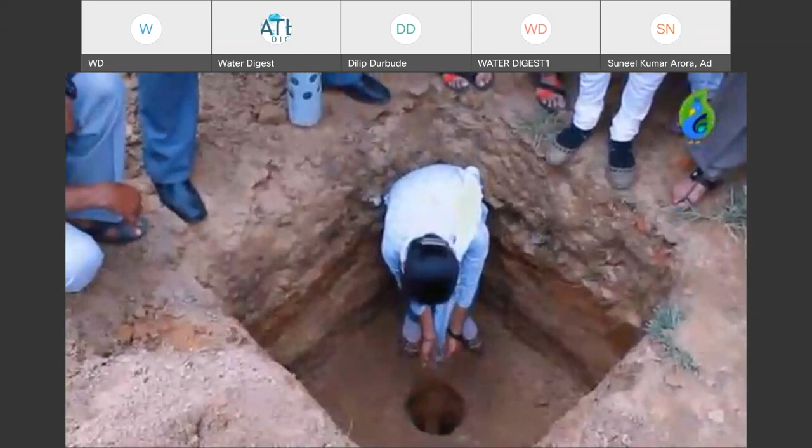Both in urban areas and rural areas, rainwater harvesting system must be made mandatory when sanctioning plans. We must ensure that water is not wasted and the groundwater reserves are recharged when the rain falls on the ground. We must catch the rain and store it.

I'm happy that the National Water Mission's campaign is taking up a timely initiative called Catch the Rain When It Falls.

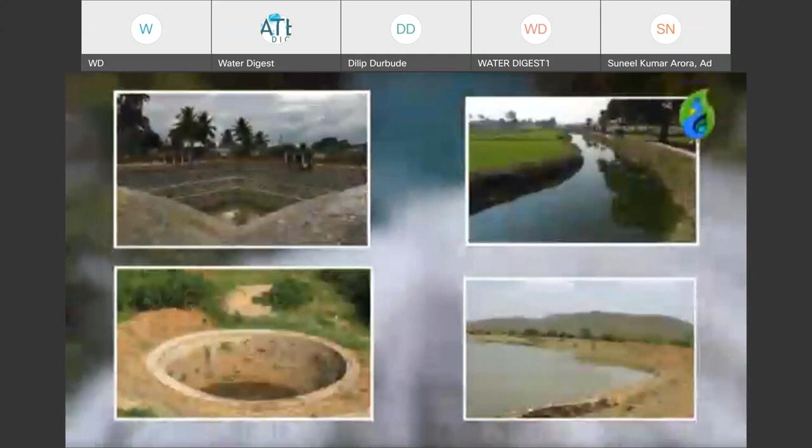We use as much as 85% of the water resources for irrigation alone, and therefore depleting the groundwater tables.

So we have a situation where we need to improve the management of our water resources, and this cannot be done only through the central and state government programs, because water touches our lives. And that's where the National Water Mission has launched major initiatives.

It conducts regular talks. Every third Friday, there is a talk on water, and on every second Friday, there is a talk on water technology issues.

Apart from these initiatives, there is the initiative of Jal Shakti Abhiyan, which was conceived of in 2019. For a campaign to be really successful, it has to have the commitment of the top political leadership.

And what better commitment can there be if the Prime Minister of the country gives this clarion call to the citizens to participate in this program.

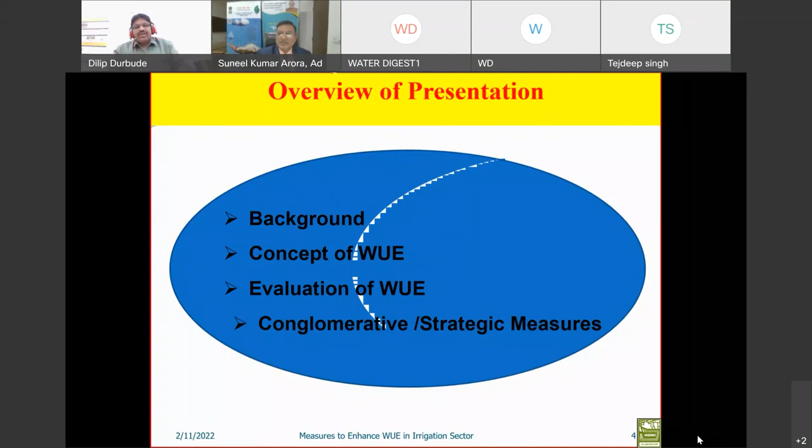For that purpose, there is a need to evaluate water efficiency so that we can utilize whatever irrigation potential has been created, effectively. So that will be the overview of the presentation.

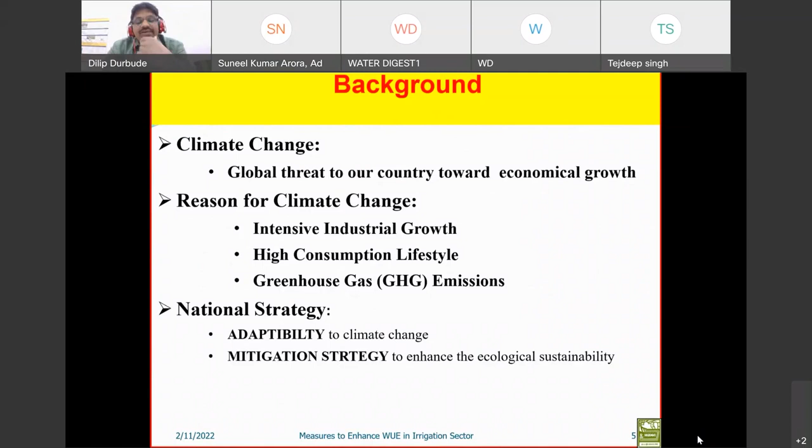This is nothing but a climate change model, because now all of you know there is a changing climatic scenario, and that is a global threat to our country's economic growth in the future. The reason is simple: industrial growth, high consumption lifestyle, and emission of greenhouse gases are behind this. To cope with or tackle this climate change scenario, at a national level we should have strategic measures — adaptability to climate change or some mitigation strategy — to enhance ecological sustainability.

Now, how is this climate change responsible in our water sector also? The distribution and quality of water resources through this cycle is altering, responsible for global warming, change in temperature, and its effect on our hydrological cycle, where we get all the available water resources — the hydrologic cycle, where storage and movement all take place.

Through this component, the crucial component for us is precipitation. There is a change in the precipitation pattern, and through this precipitation, the response for the runoff generation process is changing. That's why the availability in the surface or subsurface is changing over the period of time. If you compare the past with the present, you will find there is somewhere uncertainty in the pattern of precipitation — the distribution is uneven.

Somewhere there is more water; that is, the spatial and temporal distribution is uneven. Somewhere it is more, somewhere it is less. That's why there are now events like cloudbursts and flash floods. So the intensity of the rainfall is increasing over the period of time.

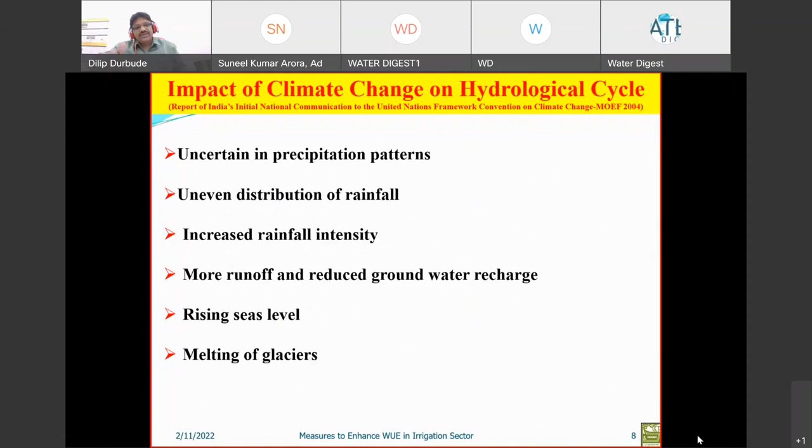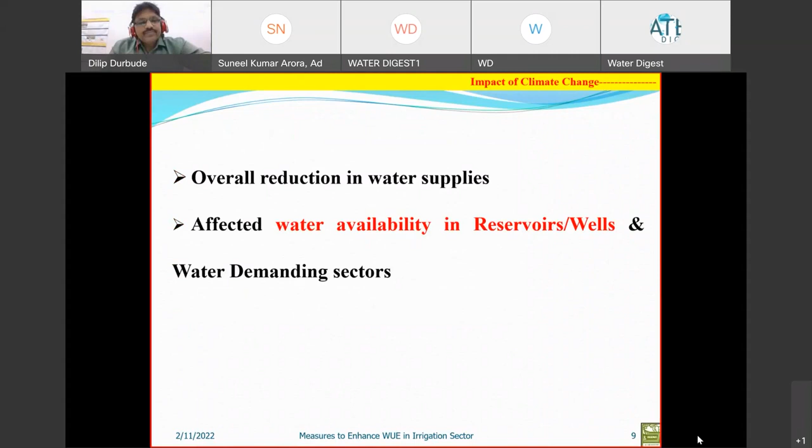This process is also affecting groundwater recharge, because once there is more intense rainfall, the infiltration and the recharge of the groundwater will be affected. Due to this, there is an overall reduction in the water supply, and that is affecting our water availability. So whatever the demanding sectors for water, they are going to be affected.

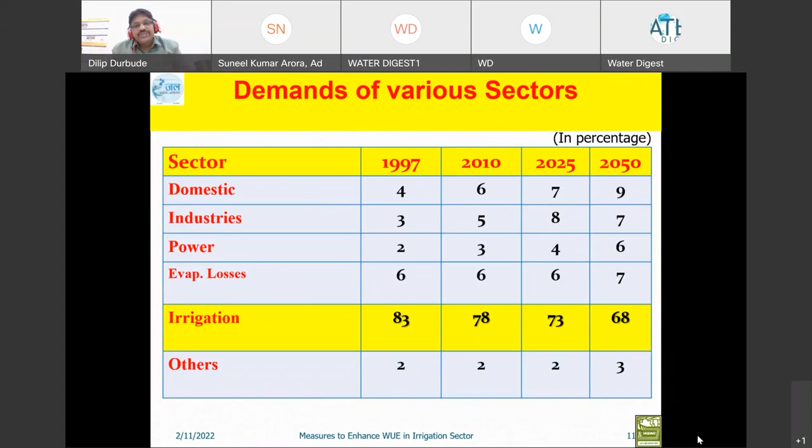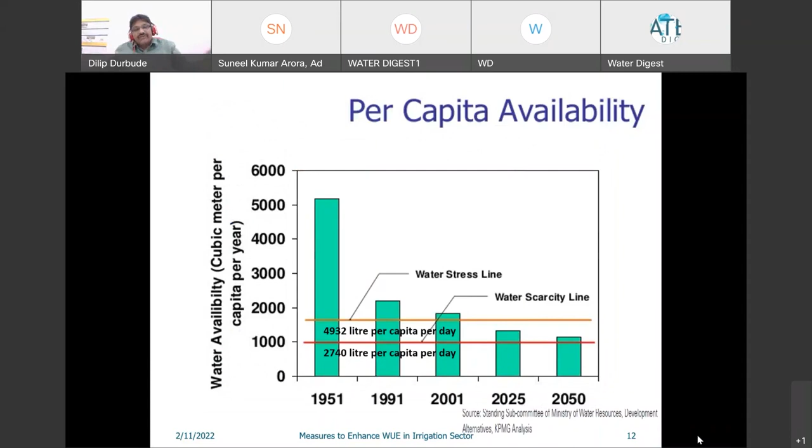Why? Because it's a high demanding sector having poor or low efficiency, and that's why in future, with per capita availability like this, you will be on the water scarcity line in the coming years. So likewise 2740 liters per capita per day will be the availability in future, and within that available water resource, we have to satisfy all our demands.

If you compare globally, India's per capita availability is very low compared to other countries, and that's why there is a gap between availability and demand. Over the period of time, maybe after 2025, towards 2050, there is a huge gap between availability and demand. Now the question arises, how to satisfy this gap? What are the solutions?

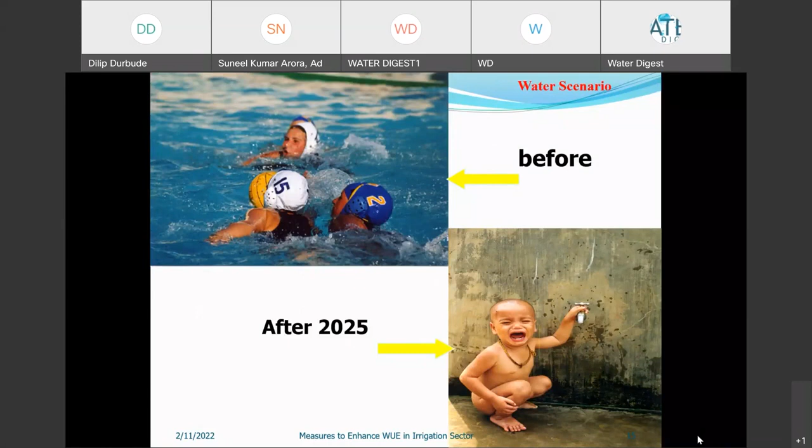And maybe the future scenario will be like this: the boy is crying for water. Even now we are seeing all these scenarios. That is going to happen in future if we don't have any measures or management aspects to minimize this gap. And that is going to hamper future water and food security. There is a probability that one out of three will get water.

Quality also, because day by day groundwater is depleting, and depleting groundwater again has water quality problems, like TDS, salt, hardness. So on one side there is an availability or quantity problem, and quality also. And that is going to impact our food security. Probably one-third of the population will not get food. Apart from this, there will be waterborne diseases.

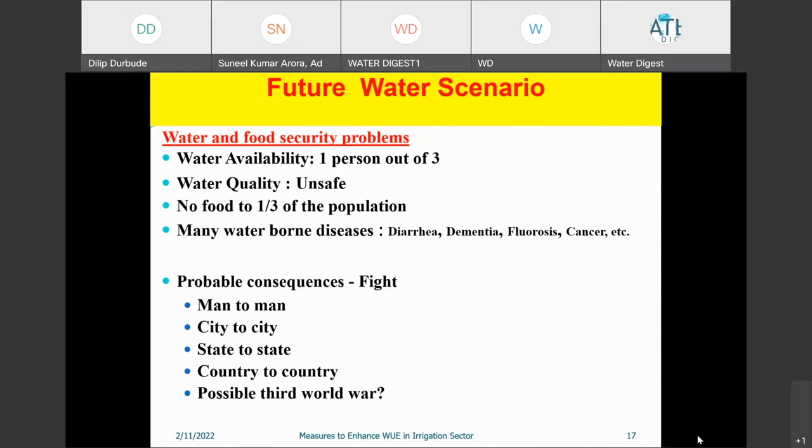What will be the impact of this? What will be the probable consequences? Of course, when one person out of three gets water, there will be a fight. Nobody will say, okay, one person is getting it, he will enjoy, and two will sacrifice. It is not like this. So a small marginal fight for water availability will be there, man to man. It may extend to city, state, country, and maybe a big fight for water. That is a possible future scenario.

So how to minimize the gap between availability and demand? It is a very good picture if you see it. Could you produce water? Could you produce it?

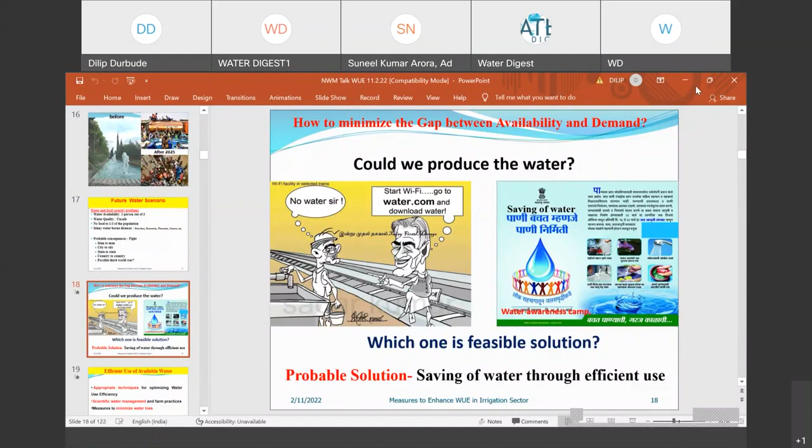Sorry for the disturbance. So from this picture, you can see that it is not a virtual quantity. So what to do? There is a requirement of saving water. Whatever the losses, you have to minimize them. For that purpose, like Dr. Arora sir told, the Jalakranti Abhiyan or the water awareness camp are feasible solutions which can solve these water problems. The probable solution is saving of water through some optimal means, and what is required is techniques for optimizing water use efficiency, scientific water management, farm practices, and measures to minimize water losses.

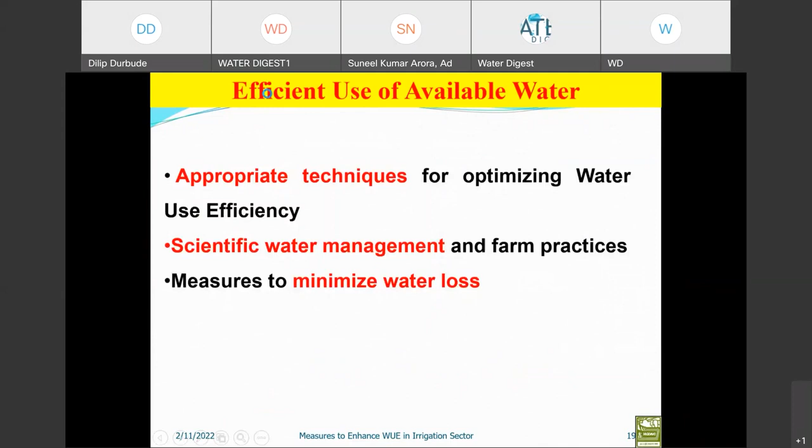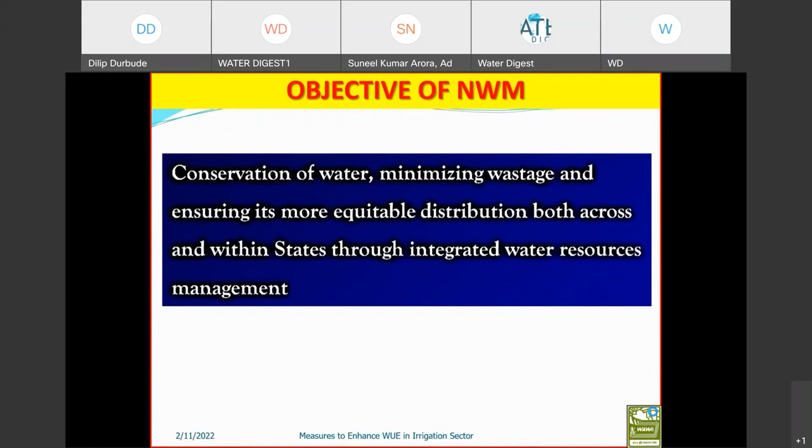So on that basis, in 2007 itself, under the NAPCC, National Action Plan on Climate Change, eight missions were formulated in mission mode, and especially one mission, the National Water Mission, exclusively to solve this water problem, with the objective of conservation of water, minimizing wastage and ensuring more equitable distribution both across and within states, through integrated water resource management. There were different goals, and one exclusive goal was increasing water efficiency by 20%. What does it mean? Whatever the present efficiency of our irrigation projects, within five years, increase the present efficiency by 20%.

So what different things are required? How to evaluate that? It is possible because, through the CWC 2016 study of 35 irrigation projects, they found that the present efficiency level is very poor. For surface water it is 35 to 40%, and for groundwater it is 65 to 70%. There is a scope to improve this with a systematic approach or strategic measures, so it is possible to enhance this efficiency up to 60%. For that, strategic measures are required on both the supply side and the demand side, strategic research and appropriate techniques, so that you can enhance the efficiency of each and every component of the irrigation project.

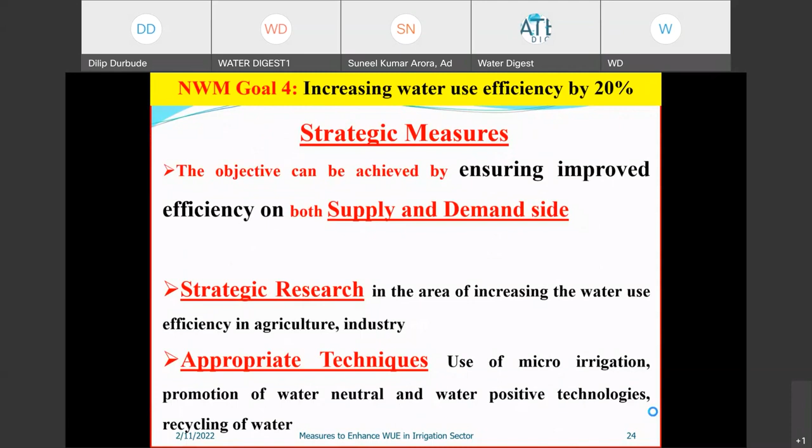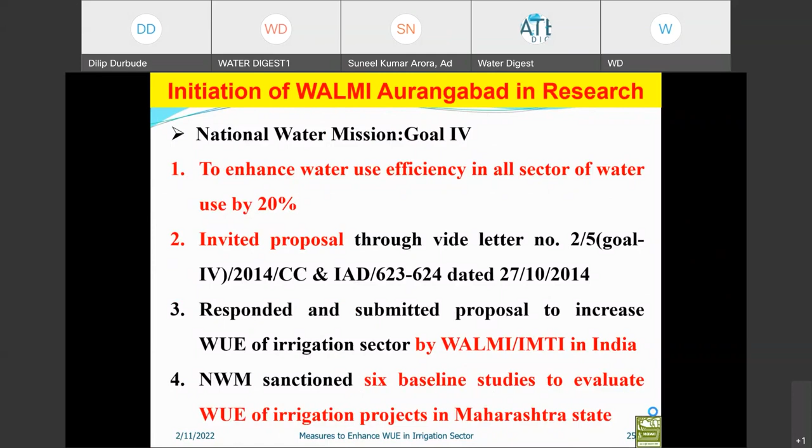So the National Water Mission, under its goal, initiated this concept of enhancing water efficiency by 20%. They invited proposals from all the WALMIs and IMTIs in India, and we responded, and they sanctioned some projects. Now about 26 projects are running on water efficiency, involving WALMI, IMTI, CWRDM Kerala and others. In Maharashtra state, we are evaluating efficiency for six projects at present, and I am going to share the experiences and measures from these projects. These are well distributed in Maharashtra, and the objective is to evaluate the various components of efficiency.

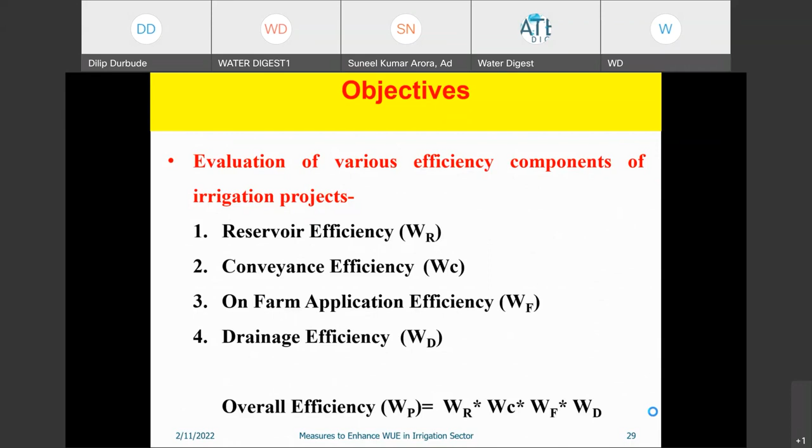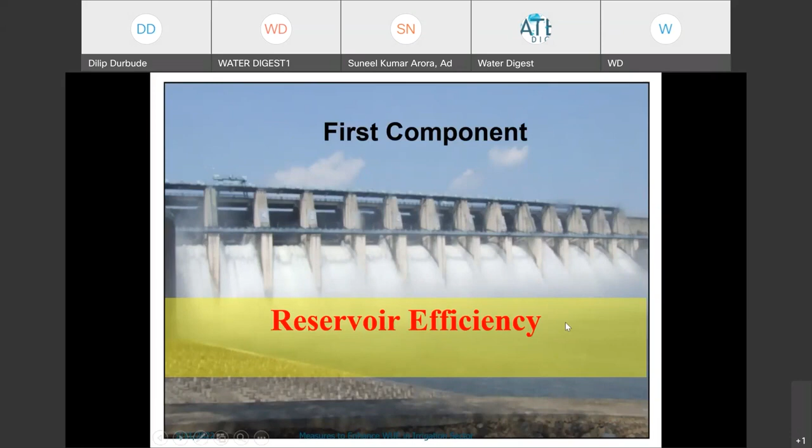Because if you see an irrigation project, there are various components, from the storage part to the on-field part. Section-wise, in the reservoir there is storage, then you have to convey it through the irrigation network, after the outlet you have to deliver the water, and you have to apply the water using irrigation techniques in the farm, that is the on-farm application part. The product of all these component efficiencies represents the overall efficiency of the project. So the first component is reservoir efficiency. That is the storage part, where you get water from the catchment, so the inflow pattern is very important. Are you getting the live storage attained fully each and every year?

Because whatever the demand or the irrigation potential utilization, that all depends upon your live storage. So the maximum live storage attained by this reservoir will reflect the reservoir efficiency or the storage efficiency. But in general, you will find that there are losses in the storage itself through evaporation, seepage, and sediment deposition also. So for that purpose, ultimately, you have to have catchment hydrology, which plays a major role in this component of storage efficiency.

So whether the catchment hydrology is studied well or not, that is a requirement to assess this runoff inflow pattern. So this is one of the case studies we conducted, and for that we carried out the storage efficiency. You find that throughout the previous 10-15 years, the storage is not 100%.

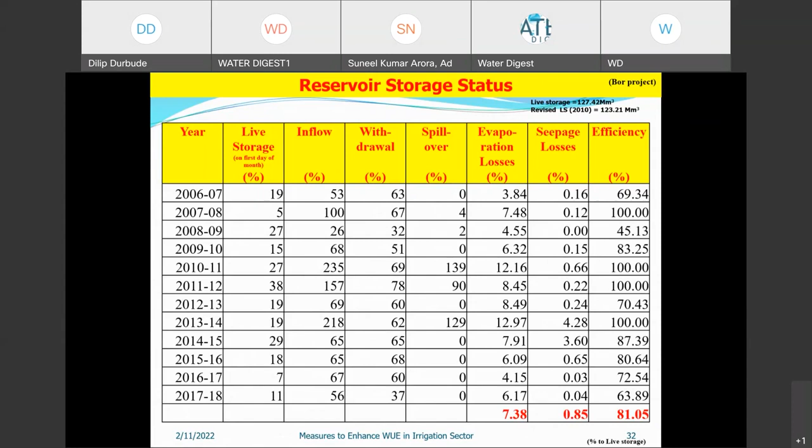Maybe due to the rainfall pattern, the catchment yield is not that much, the inflow pattern is not giving 100% storage. So due to this, if you see the average efficiency, it will be reduced, it is not 100%. That is going to affect our overall project efficiency. So in that way, you can find out whatever the losses in the storage part, and whether it is attaining live storage or not.

Second thing is, you see that here is a revised live storage. What happens actually, through this inflow pattern, it is carrying sediment from the catchment. That is depositing not only in the dead storage, but it is depositing in the live storage also, the suspended part. So over the period of time, our live storage is reducing due to siltation. So there is a need for this revision of the live storage.

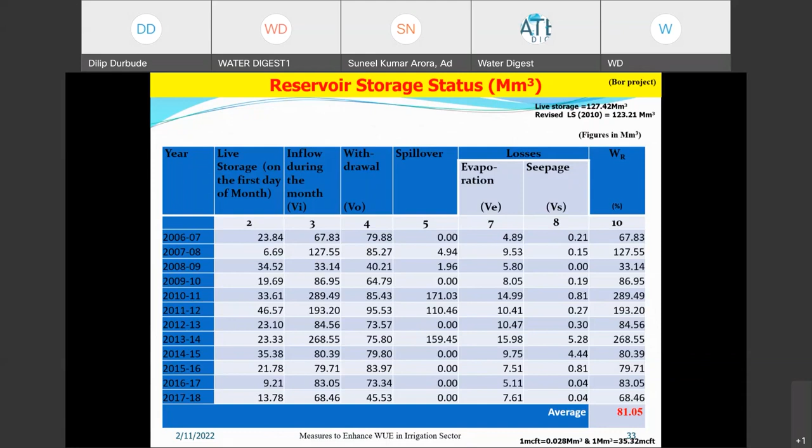There is a requirement for this revised live storage calculation. In every project there is an elevation area capacity table. So you have to revise that elevation area capacity table so that it will reflect the actual live storage you are getting over the period of time, on average. That is the storage efficiency. In the figures you can see the inflow pattern, how it is. So every time you are not getting the net storage full 100%.

Apart from that, there is whatever spillage over the weirs. Only 3 times is there in Maharashtra. It is happening because it is the Marathwada region, or you can see in the other regions also. The reservoirs are not attaining the full live storage. So that is going to impact this reservoir storage efficiency. Likewise, in the live capacity also, there is a loss due to evaporation and seepage, and that loss is there every year.

You have to see those losses also, and accordingly, you have to analyze the withdrawal from the canal system over the period of time for the different seasons. So you find that even though the reservoir attains the live storage capacity in most of the years, there is only an optimal withdrawal up to 78% of the net storage.

Why? Because there is a lack of assurance among the farmers. They are worried that if they go for the cropping pattern or more agricultural cultivation, will they get the rotation of the water? Will they get irrigation water timely, whenever they require it? That's why they are not demanding also. There is a lack of demand due to their lack of assurance of timely irrigation.

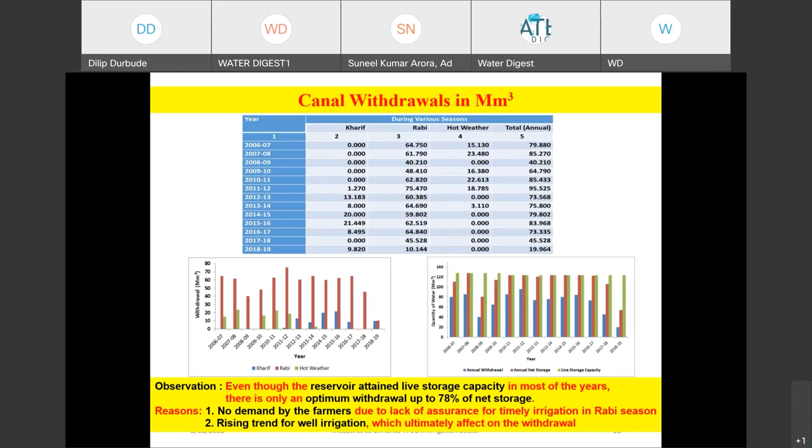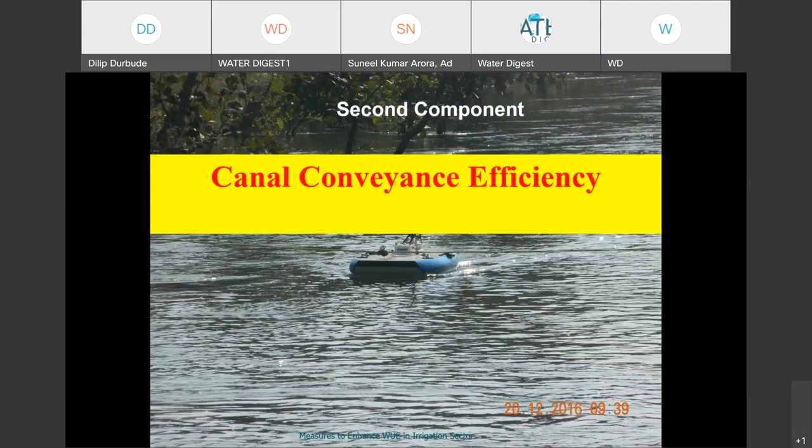Second part is canal conveyance efficiency. Is our network well managed? Is the repair and regular maintenance there or not? That is the question.

Because from this head regulator, whatever the desired flow, is it flowing throughout this network or not? If it is not flowing throughout the network, then there are a number of losses in there. So it is the delivery at the inlet to the block of the field to the project release at the headwork. That is the ratio between these. And as per the CWC guideline, the inflow-outflow method, you can use this to evaluate the conveyance efficiency part.

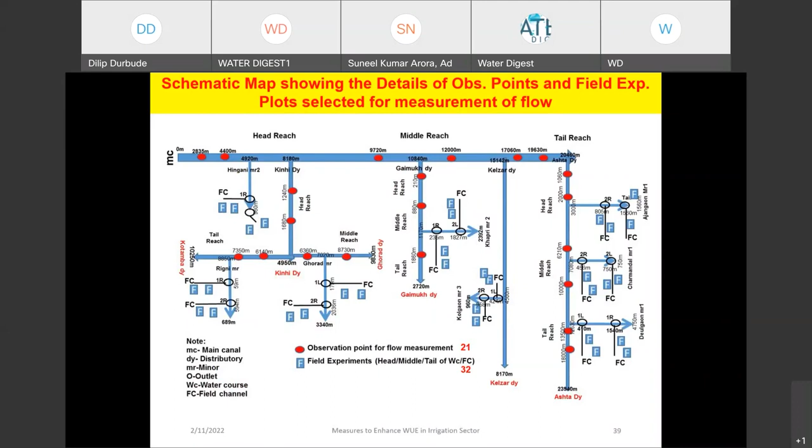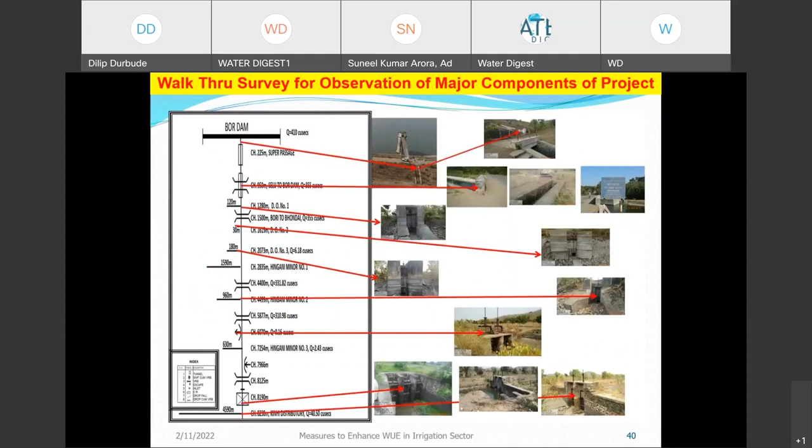So it can be evaluated by sample means in the head, middle, tail reach. Likewise, you can categorize this command area, and within these various reaches, you can measure these losses. Whatever the different losses through this main canal, then distributaries, minors, can be measured, and you can identify the seepage losses through this network. So for that purpose, we conducted this walkthrough survey. We identified the conditions of the various flow controlling structures, flow measuring devices, cross regulator, head regulator, all these things. And we tried to find out the present condition of this conveyance network.

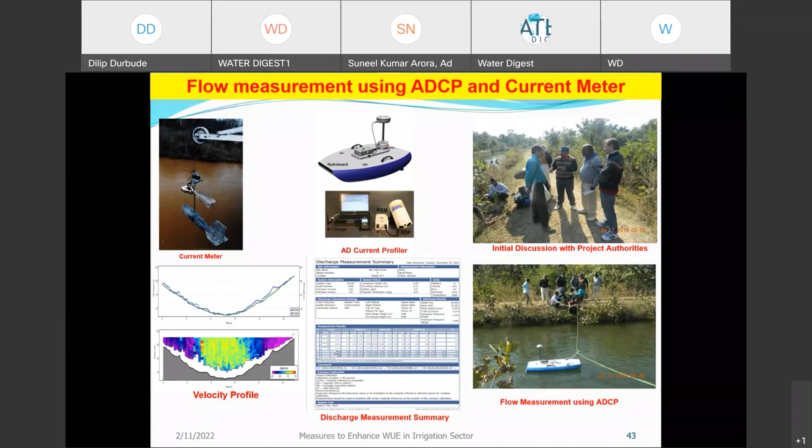And here, for the first time, we used this ADCP instrument, that is an acoustic Doppler current profiler. If you compare this ADCP with a current meter, there are a number of huge advantages. Time requirement, and accuracy wise, it gives a velocity profile, while the current meter requires a number of readings within one section. So it is an enhancement, an advanced instrument you can use, and you can measure these conveyance losses in a timely way. So we tried to measure these losses using this acoustic Doppler current profiler at various sections of the canal network, in the head, middle, tail part of the main canal, distributaries, and all other things.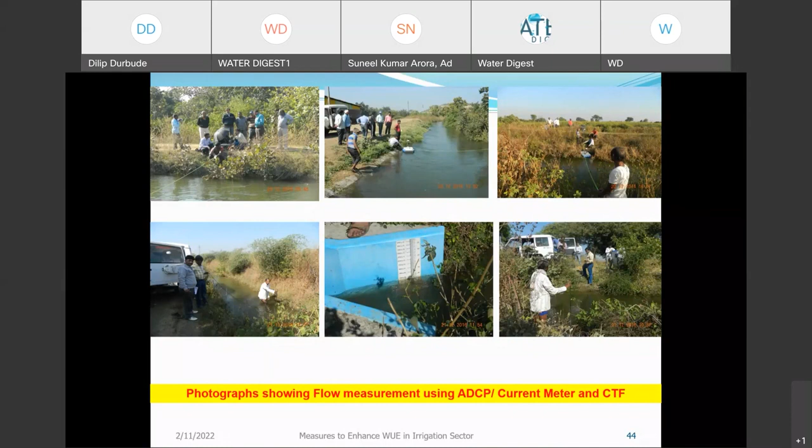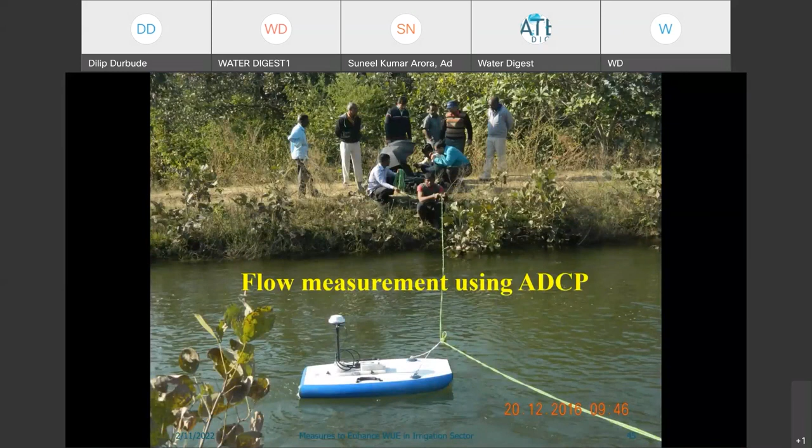Apart from this, in the small canal network, the ADCP will not work. For that purpose, we used the CTF, cut throat flume, and also the standing wave flume. Likewise, measuring devices were used. This is like a boat, and within 20 minutes or one scan, it will give a velocity profile. So within maybe 20 minutes, you are able to measure the flow through this section of the canal.

And you find in this profile that the velocity is varying. At the edge points it is low, and in the middle portion it is high. So the velocity is not the same throughout this section. That's why if you are using a current meter, you have to take so many measurements. One or two measurements will not give a correct measurement of the flow at this particular cross section of the canal. Compared with the current meter, the ADCP, with minimum time and great accuracy, will give a better result. And the table is also given. It gives the width, area, and flow also.

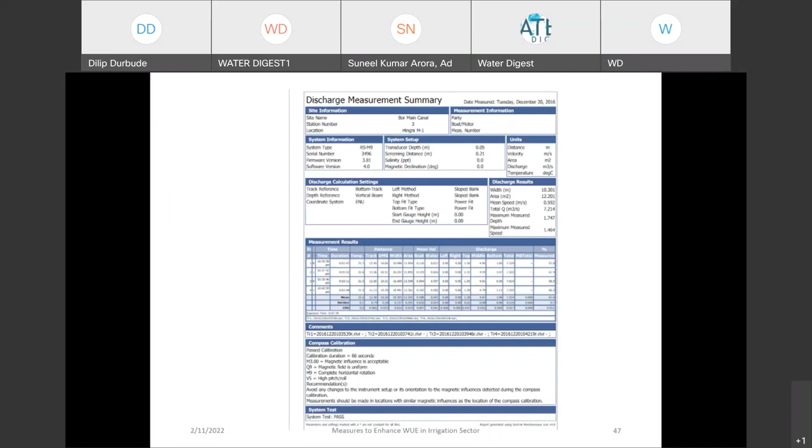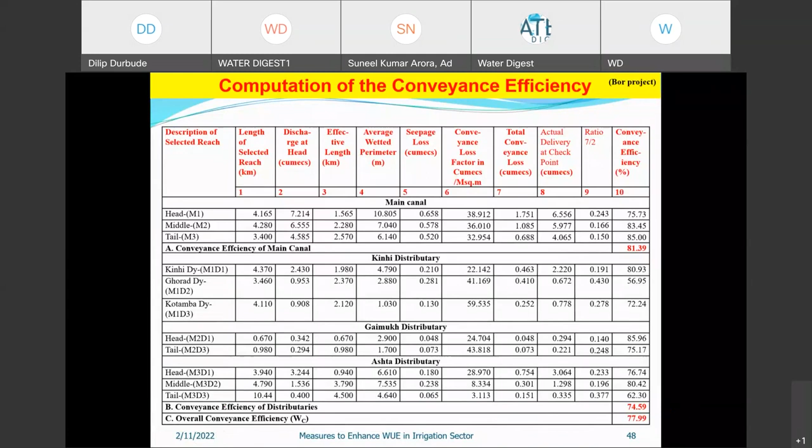So what is the reason behind this? The reason is that there is no regular or periodic maintenance of the flow controlling structures. Head regulators are not maintained. Then how is it possible that the desired flow will flow throughout the section? So regular maintenance is required. The second thing is canal linings are disturbed.

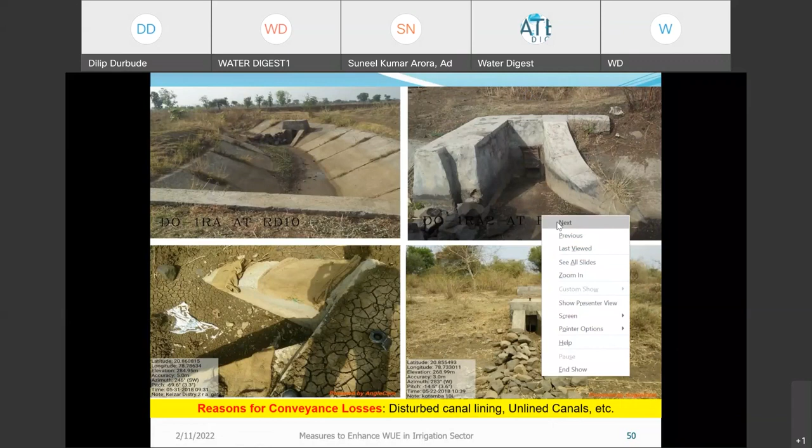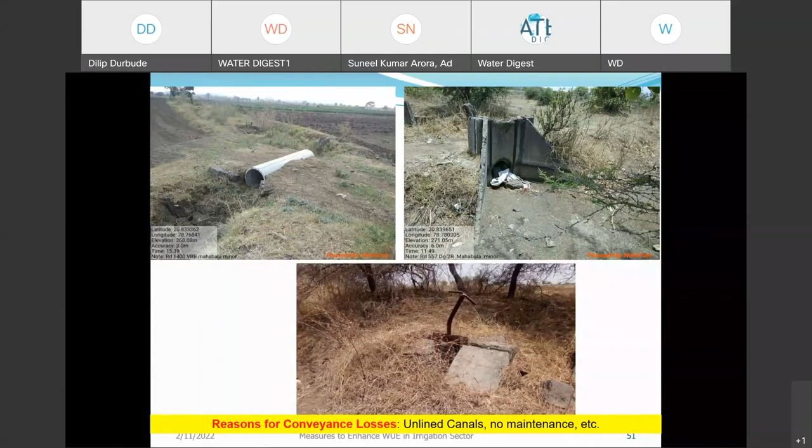So the reason behind this is disturbed canal lining. So these are the maintenance part. Throughout this network, you find that the problem in this project also is manpower problems, and second thing is that the field canals are not maintained well. So those are the reasons why this conveyance efficiency is not as per the requirement.

Third part is the on-farm application. This is a very important part because it is now the demand side. Reservoir efficiency and conveyance efficiency are the supply side part. In the demand side part, on-farm application efficiency, you find that there are two losses in the farms. One is through the field channel, and second is the application of the irrigation method.

So how accurately you are giving water as per the water requirement, the applications are not there. So in that case, the water course field channel losses, is it lined or not? And second is the on-field application part, there are losses through deep percolation or leaching. That means whether the irrigation applied is as per the crop water requirement or not. So if you see this field water balance, then you find that

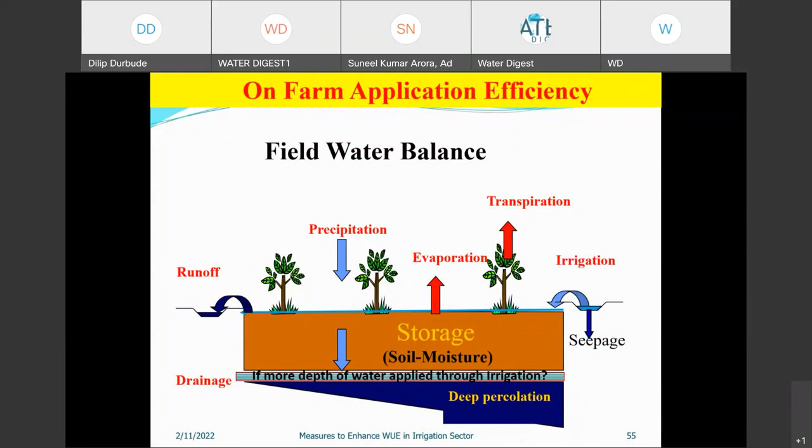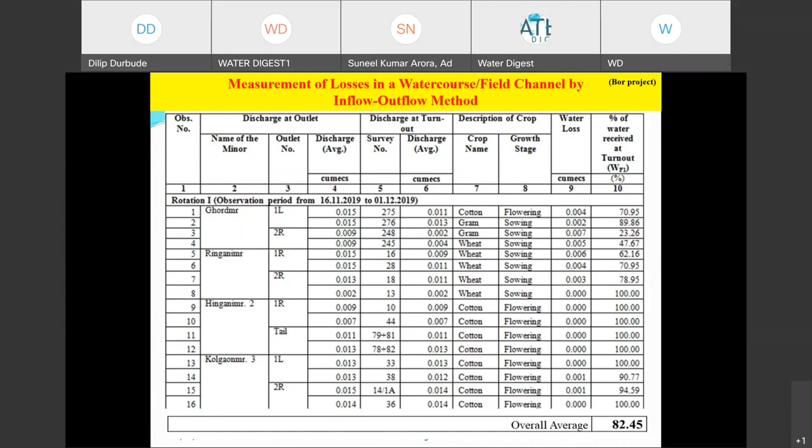But where there is a distance, meaning a conveyance part in the field channel, there are losses in the field channels, and that's why the overall efficiency of the field channel gives a lesser value. Second thing is the crop water requirement: whether the water you are supplying is as per the main crop water requirement or not. If there is under irrigation or over irrigation, then the water efficiency in this second part will be affected.

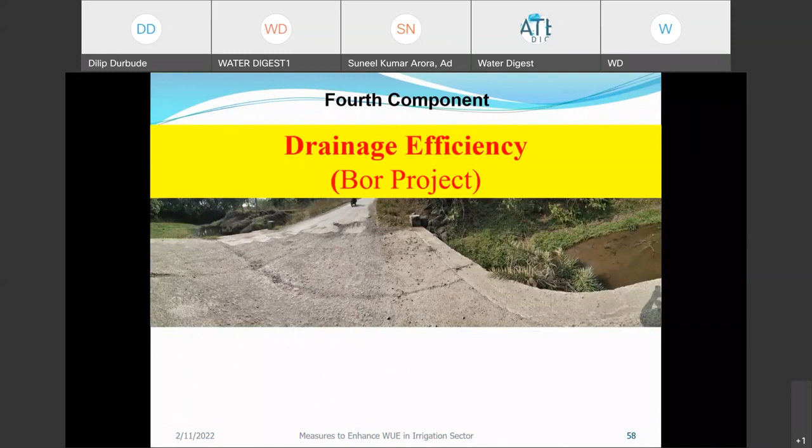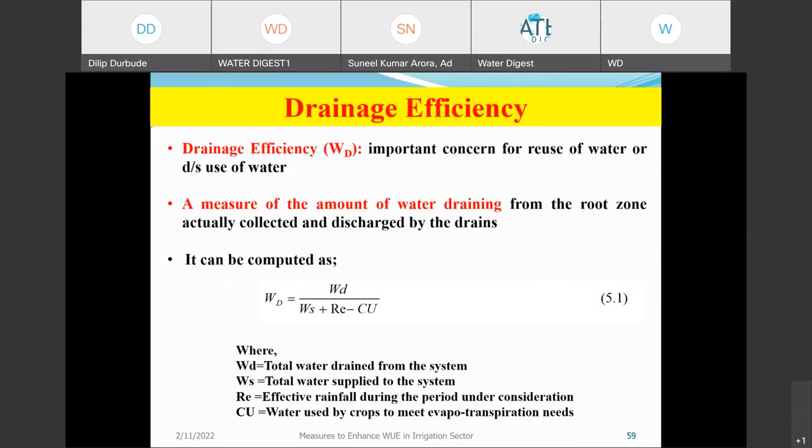Fourth part is the drainage efficiency. If your application is as per the water requirement, then there will be no problem with the drainage efficiency. Whether your drainage network is good or not, again you have to see. In that case, you have to see the total water drained from the system and the total water supplied for the crop water requirement. The ratio will reflect the drainage efficiency.

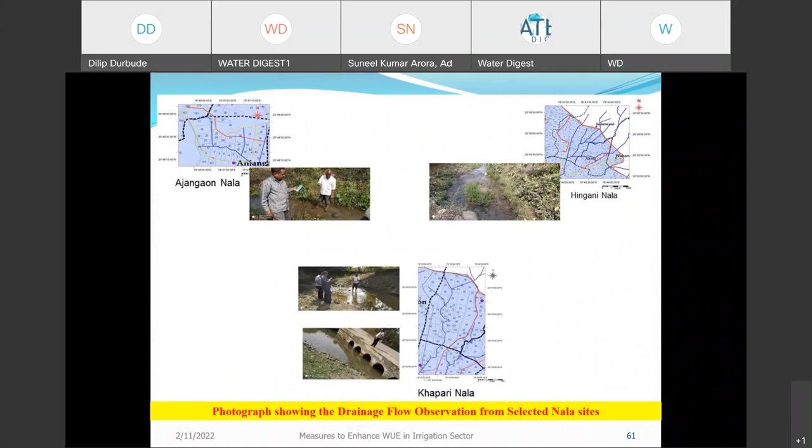So for that purpose, we have taken a number of drains in the command area, and you measure whether drainage losses are there or not. But in this project, you find there are none, because whatever quantity you apply through the command of the minor or the distributary is consumed there itself. It is not that much, so that excess amount goes out of that command area. That's why the drainage efficiency is very good.

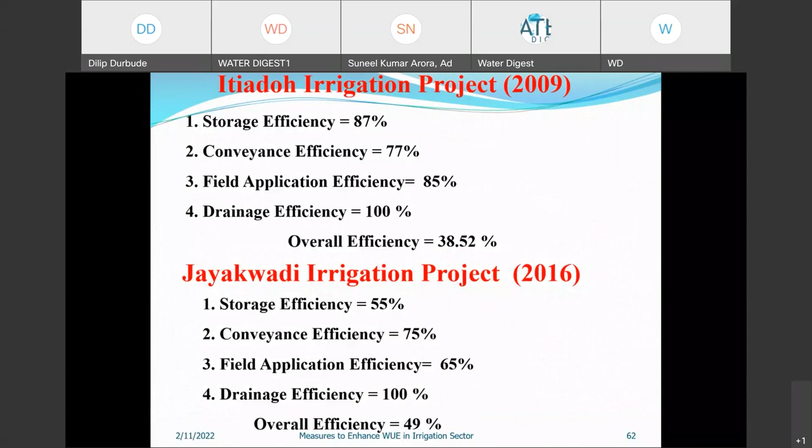In the Itiadoh project and in the Jayakwadi irrigation project also, working out using this methodology, you find that the overall project efficiency is within the range of 35, 40, 50. In this project also, all the water efficiency components can be computed, and you can find the overall project efficiency. But we can have a practical achievable limit. Reservoir efficiency can be achieved up to 95 to 98%. But if it is less, 80% in our case, what cumulative or strategic measures can you adopt?

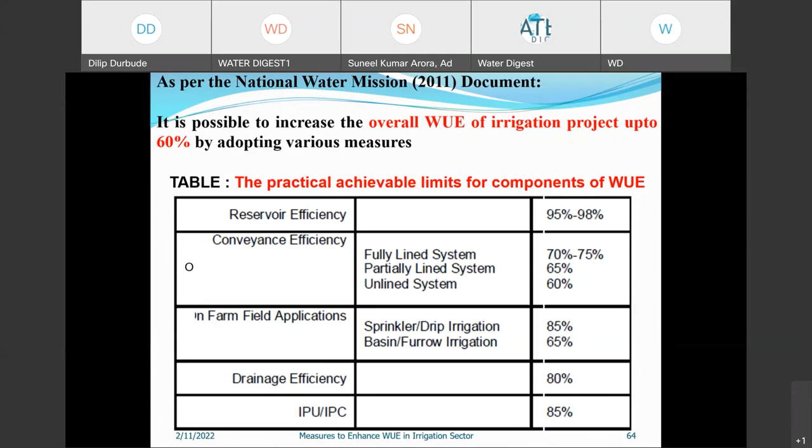The reason for this reservoir efficiency against the practical achievable limit: one thing is the inflow pattern, and the elevation-area-capacity table is not revised. Second, there are evaporation losses and seepage losses. So you need measures to enhance this efficiency and achieve the practicable limit. Likewise, in conveyance efficiency, are the canals lined or not? What are the seepage losses? Is water taken out in any unauthorized way? That you have to see. Likewise, you can achieve this efficiency with policy level or institutional level measures.

So my purpose of this presentation is to tell about the strategic cumulative measures so that you can enhance this poor efficiency level, which is 38%. It can be enhanced up to 60% if you adopt some measures for that purpose.

As already discussed, periodic assessment of the sedimentation in the reservoir and revision of the elevation area capacity table are needed so that you can have a revised live storage capacity, and accordingly your storage efficiency will be as per the actual.

Second, you have to carry out hydrological studies of the catchment for yield assessment so that there will be an improvement in efficiency. If there are losses through evaporation, it is possible to minimize these losses through windbreakers of bamboo trees, or you have to go for catchment area treatment. Likewise, there are measures or policy level decisions you have to take.

When I worked with the National Institute of Hydrology from 2002 to 2007, there was a drive to assess or reassess this live storage capacity using digital image processing of images acquired through remote sensing technology. That technology can be used to revise the live storage or the elevation area capacity of the project.

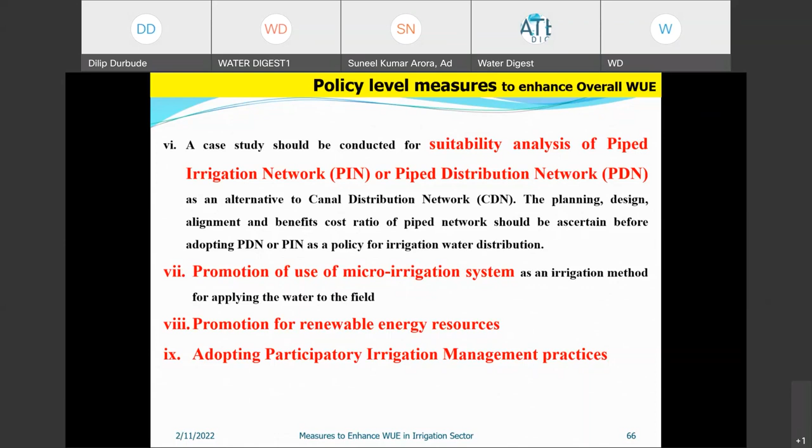Then, promotion of renewable energy resources, because adopting micro irrigation again creates a problem for electricity. So solar energy, solar power, solar cells can be promoted and adopted, along with adopting participatory irrigation management practices. These are policy level decisions that can be taken.

Apart from this, administrative level decisions like improvement in the distribution network, structural measures, selective lining of canals, regular replacement of damaged gates, and regular repair of flow controlling and flow measuring devices.

Then, formation and strengthening of water user associations, because water user associations have a major role - they should have their own system and manage it themselves. Likewise, in Maharashtra itself, through the MMISF Act 2005 and Rule 2006, they are now thinking about handing over the management of the project through water user associations.

Such things should be there. Apart from this, there should be training of the farmers, because in the stakeholder workshop they are not clear cut about these issues. They have to be sensitized about this water problem in the future, water saving technologies, adaptation of micro irrigation. For that, awareness and farmers training should be there so they can understand this water crisis problem and the advanced techniques of irrigation better.

So in the field, if you find what is needed, because there is siltation, there is a flow controlling and flow measuring device. It is called the CTF, cut throat flume.

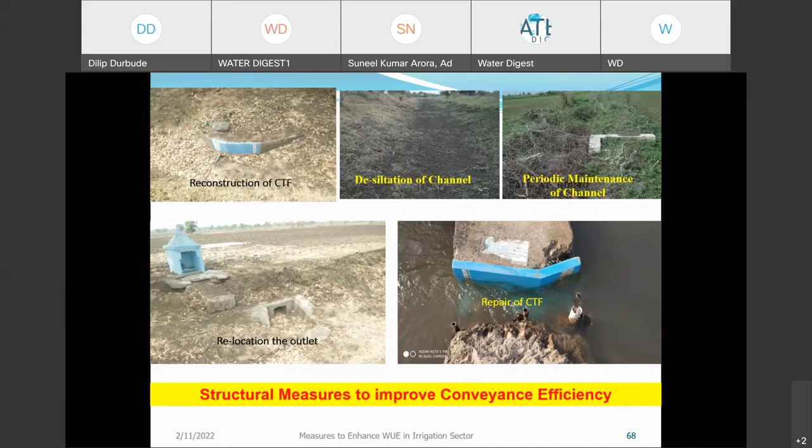So likewise, though it is a measuring device, it gives the design flow of this minor or canal. They should be aware about this. That's why they are just damaging the structure - they are not able to maintain this channel, and somewhere they misuse it.

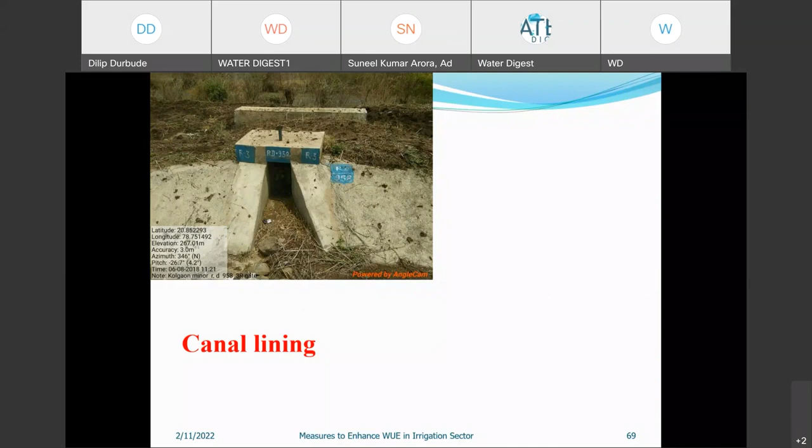It should be maintained properly. In one of the projects we've seen that the outlets are proper, canals are lined properly, managed lining is there, and there is CTF clearance. In some projects where such activities have taken place, you find it is able to enhance utilization of the irrigation potential created, and you can supply water up to the tail end also. So that should be there.

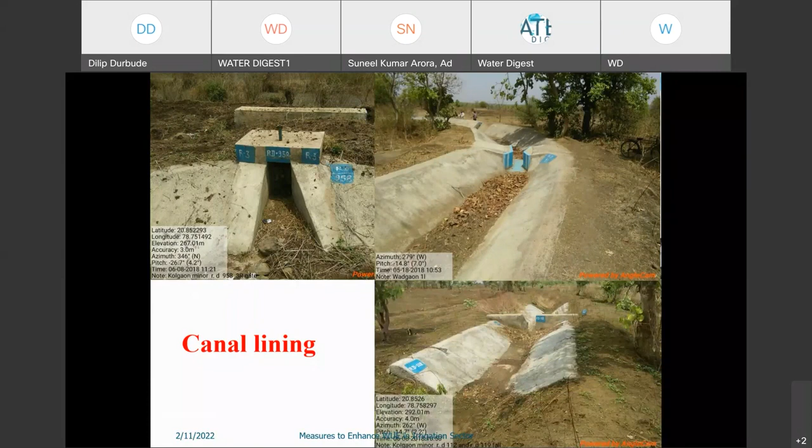Some exposure to the farmers about this project would be there. Then repair of the damaged lining should be there. If the damaged lining is not repaired, there will be a seepage problem like this, with seepage losses. So you can enhance efficiency or minimize these losses using repair and maintenance work.

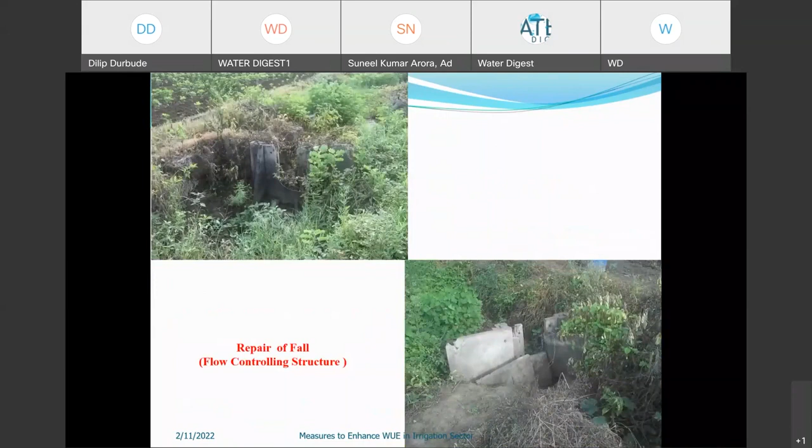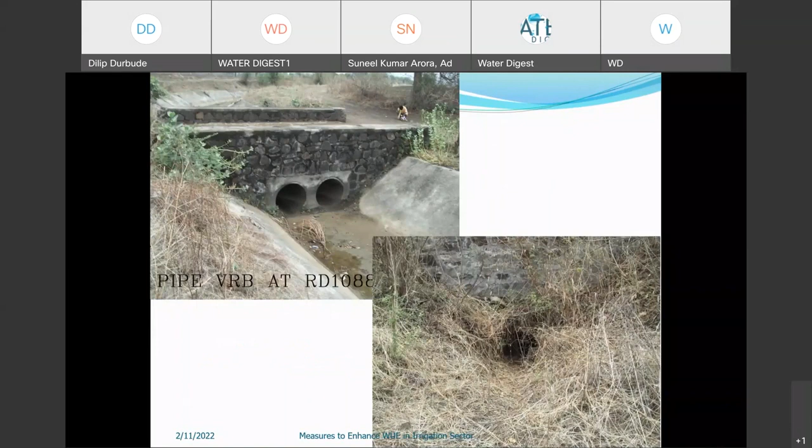Maintenance of the flow controlling structure should be there. Repair of the falls should be there, and flow controlling structures maintained. There should be maintenance of the canal like this - it should not be like this, because then the design flow will not flow through this canal. Some flow controlling structures should be there, and they should not be broken.

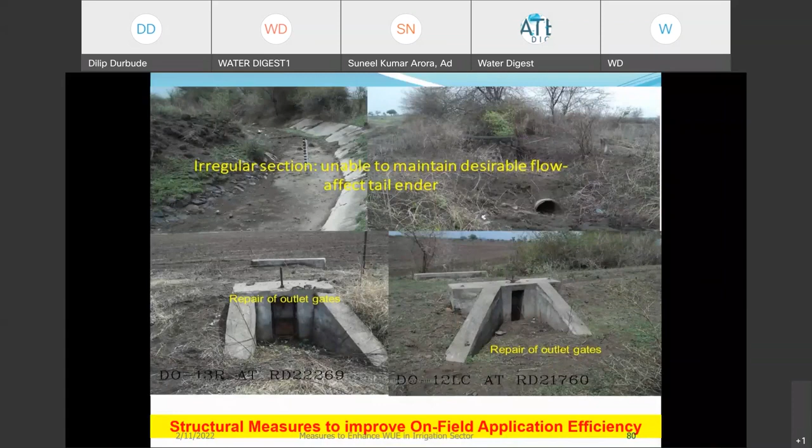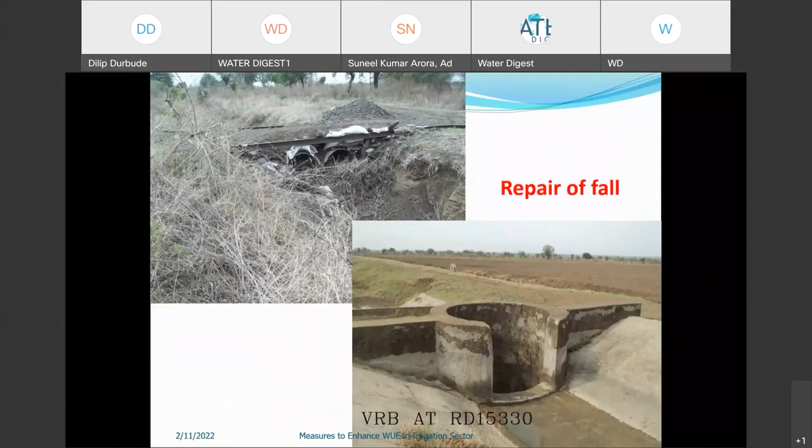Likewise, you have to make farmers aware so that they do not break these controlling structures. Channels should be desilted where siltation is there, so that the regular section is maintained - otherwise it will be unable to maintain the desired flow and that will affect the tail ender. That's why all this repair and maintenance, these structural measures, you have to adopt for this purpose. Once that structural measure is adopted, it is possible to enhance water efficiency.

Likewise, if there is flow through the field canal that is unlined, there are losses of course. So you have to, if possible, line these field canals also as they irrigate their fields.

They don't know how much quantity of water they have to give to the cotton crop. Their opinion is just to irrigate the field for 20 or 30 hours - there is no scientific way, no calculation. They go by their experience, their mental model over the period of time, just irrigating the field. That's why there are huge, tremendous field losses, and we are getting poor on-field application efficiency. All these losses can be minimized.

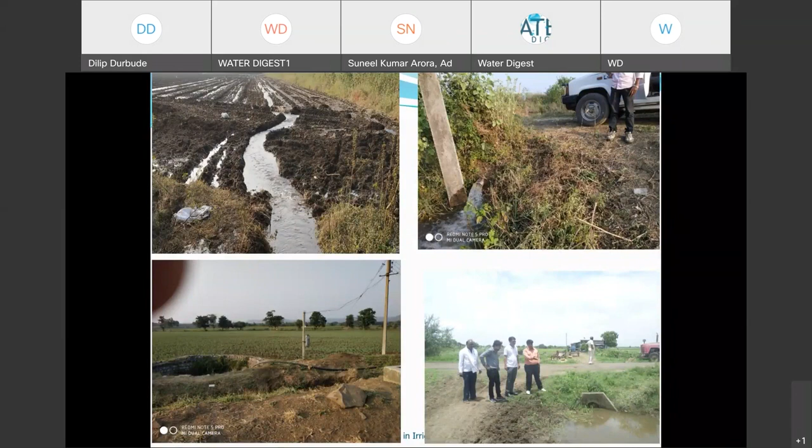Why? Because they don't want to give this volumetric basis water charges. To avoid that charges, they are doing this. Here is a pipe, and they are just taking the water in an unauthorized way. Here also there is no defined channel, where to give, how much to give.

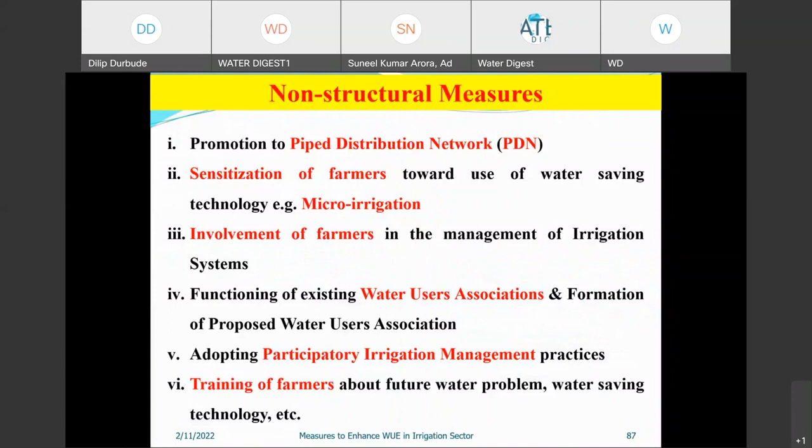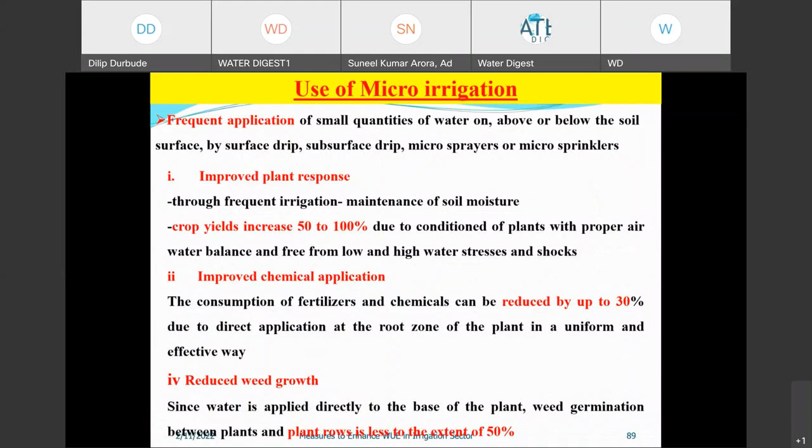So all these are problems in the field, and they are affecting water use efficiency. For that purpose, promotion of pipe distribution networks, sensitization of farmers, involvement of farmers, water user associations, and training should be there so that they don't go for flood irrigation. They should adopt micro irrigation, and be made aware of its advantages: improved plant response, improved chemical applications, and saving of fertilizers with this water saving technology.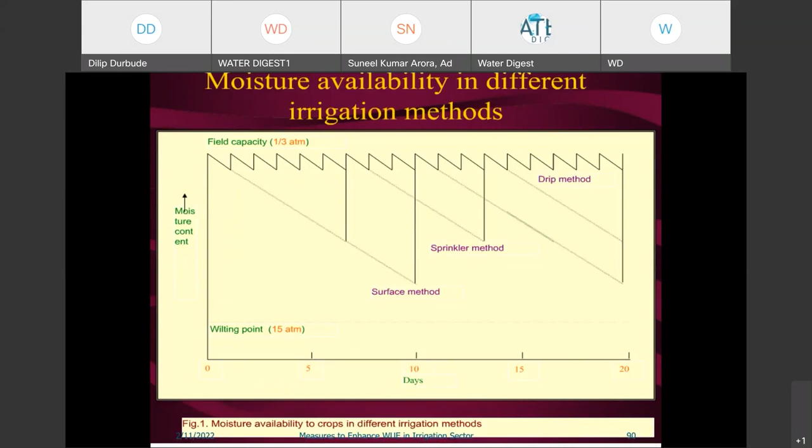Likewise, you have to make farmers aware about moisture retention, because if you go for drip irrigation, the retention period is more compared to surface and sprinkler irrigation. So with drip irrigation, moisture availability in the root zone will be maintained, and you have to apply minimum water for irrigating the field, so that with minimum water you can satisfy crop water requirement and enhance on-field application efficiency.

So likewise, you have to sensitize stakeholders about this technology of micro irrigation, that neither under-irrigation nor over-irrigation is good, both are problematic, as application efficiency suffers and production also doesn't increase.

Likewise, you have to make them aware about the saving of water due to drip irrigation, how much quantity of water can be saved. Not only saving water, but there is a simultaneous increase in yield also. So with minimum water, they can get more yield.

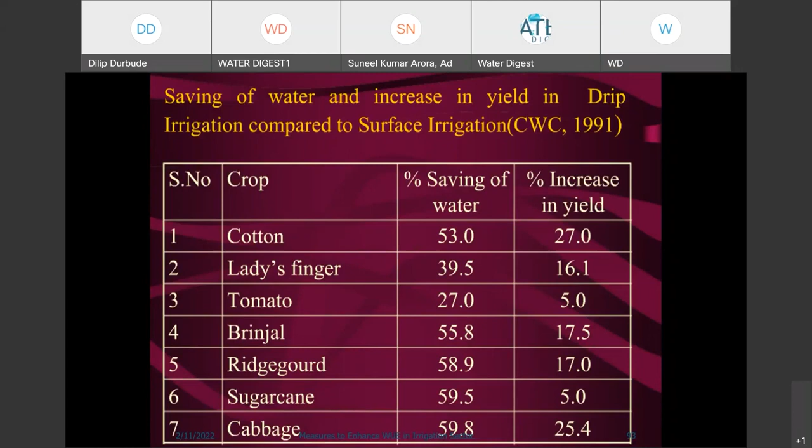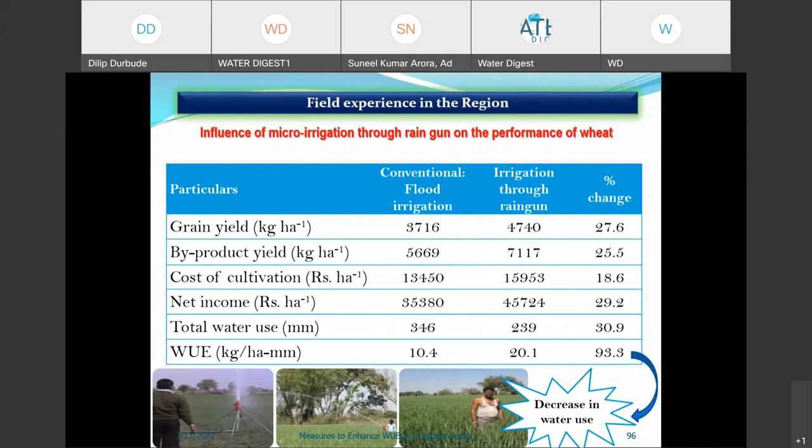So likewise, this technology should be given through stakeholder workshops. One study we conducted on sprinkler irrigation also showed that you are able to save water, and at the same time increase the yield. That is possible with this. So a number of examples are there of minimizing water use while increasing yield.

Over the period, we tried conducting stakeholder consultation workshops, and we tried to take the views of farmers about this. They had opinions like this.

They are not aware of the different schemes of central government, state government, and different technologies under various departments. Their opinion is that there should be an integrated approach involving the water resource department, agriculture department, and the banking side. There should be integration so that they can understand how their yield will increase, because with minimum water also they can increase their yield.

They are more concerned that they have to increase their yield and increase their returns rather than just saving water. Saving is a part of it, water saving is there, but side by side with saving water, they can enhance their returns from irrigated agriculture, so that they can adopt micro irrigation.

Likewise, you make them aware about central sponsored schemes. Micro irrigation started in 2007. In 2010 it was upscaled into the National Mission on Micro Irrigation, and now it is under the National Mission on Sustainable Agriculture, NMSA. Under this mission, on the part of on-farm water management, there is a provision for the micro irrigation scheme component under Pradhan Mantri Krishi Sinchai Yojana, also at a subsidized rate.

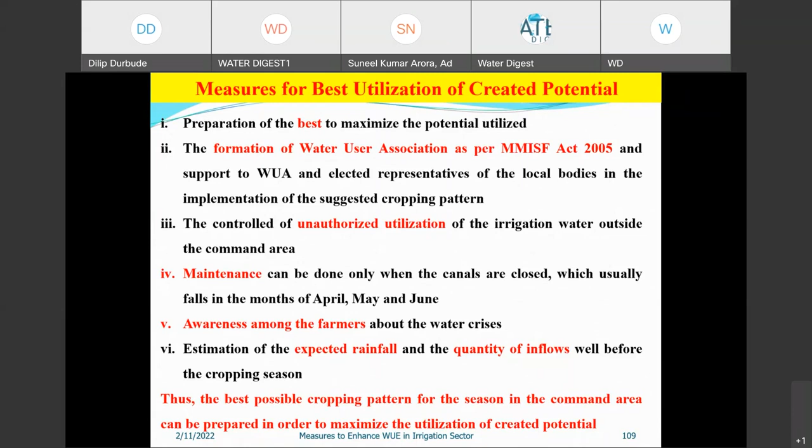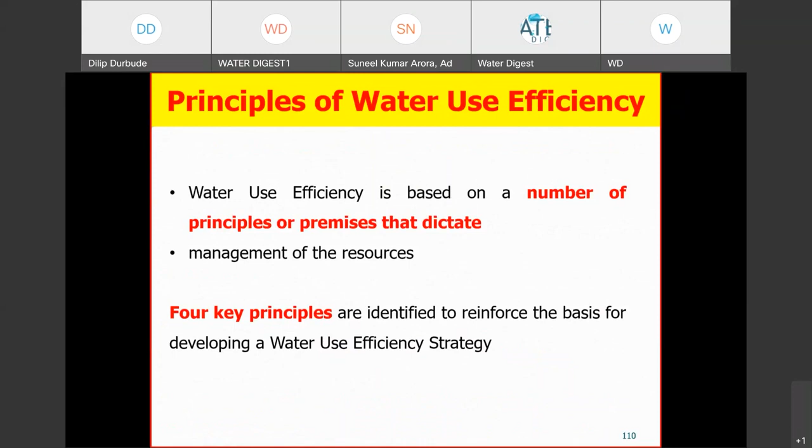Overall, in water efficiency we have to follow some principles, and we ourselves, farmers and all, must be aware of the principles of water efficiency: that it is a valuable resource, essential for the health of humankind, and has intrinsic social and environmental values. Second, it is a finite resource, so it should not be misused. It should not be assumed that it is endless.

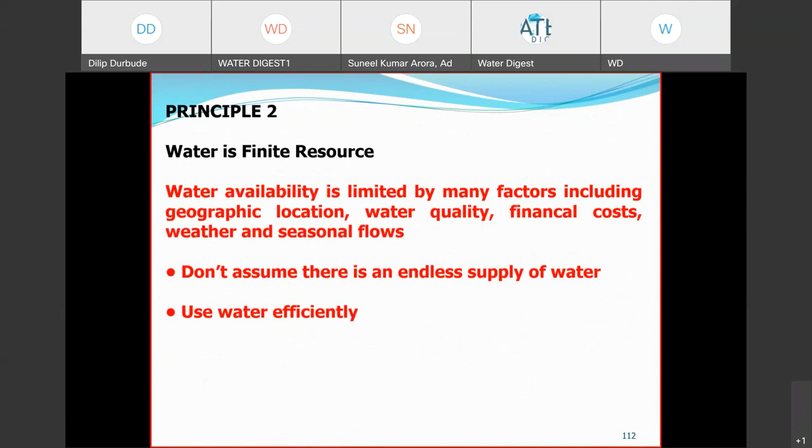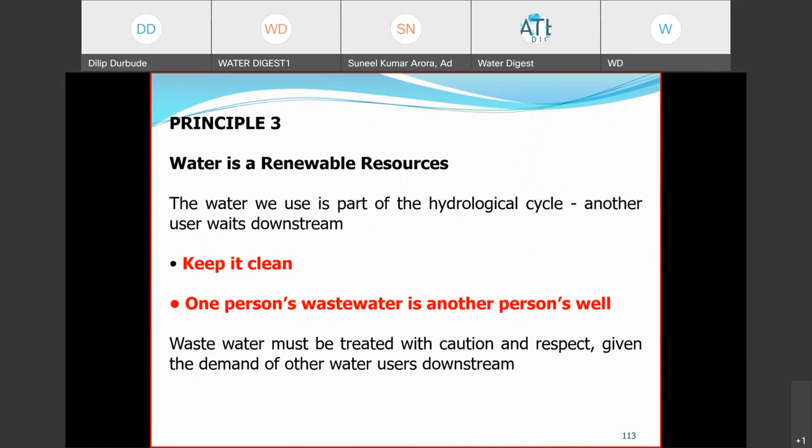And it is a renewable resource, so if you are on the upstream side, when releasing to the downstream side, it should be understood that it should be clean. One person's wastewater is another person's well. In that way it should be maintained. And it is a shared resource, so respect the needs of others, humans and all other living things, and manage water for intra- and intergenerational needs. That principle should be followed for water efficiency enhancement, and by saving all the losses, you can enhance the water efficiency of the irrigation sector.

So those are the measures I share with you. I tried to share my experiences of these baseline studies and the different measures possible for enhancing water efficiency in the irrigation sector.

So thank you, sir. Some problem was there with the net. So now you can discuss this topic. Yeah, Neha ji, we can have the question and answer session now. Sure, sir. Thank you, sir. Due to some net problems the PPT was not properly seen, I think, even though we did a trial run first. Thank you, sir. These technical hazards are always there whenever we have video conferences. Thank you so much for the wonderful presentation, sir.